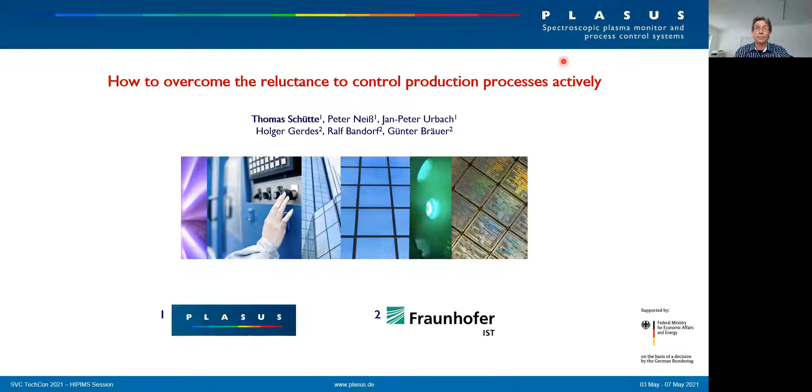Since HIPIMS is still a cutting-edge technology in production lines, I will demonstrate the benefits and perspective of active process control at a HIPIMS application. So far, quality control is mainly done at the final product. Whether it's a batch-to-batch application or an inline application, the final product is evaluated and then the process is adjusted.

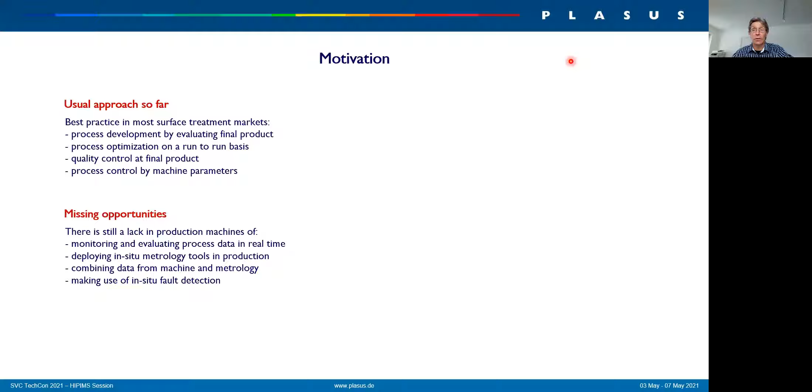However, there is no data taken from the real plasma process itself. And with this, you are missing a lot of opportunities to control and to monitor your process in situ and in real time. On the other side, there are a lot of metrology tools available today which can do this job. They can measure plasma parameters in situ and in real time. They are capable of controlling specific parameters, reliably and on a long-term basis, and they are ready for system control.

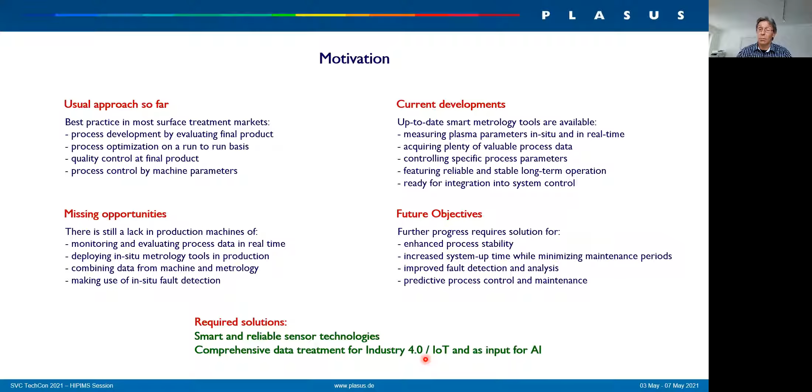And again, for all future applications, there is still the need for enhanced process stability, to make the product better, to make the process more stable, to increase production yields. And in our opinion, this can only be achieved with smart and reliable sensor technology, which will then provide data for a comprehensive data treatment within the framework of Industry 4.0 and IoT, and as input for artificial intelligence evaluation.

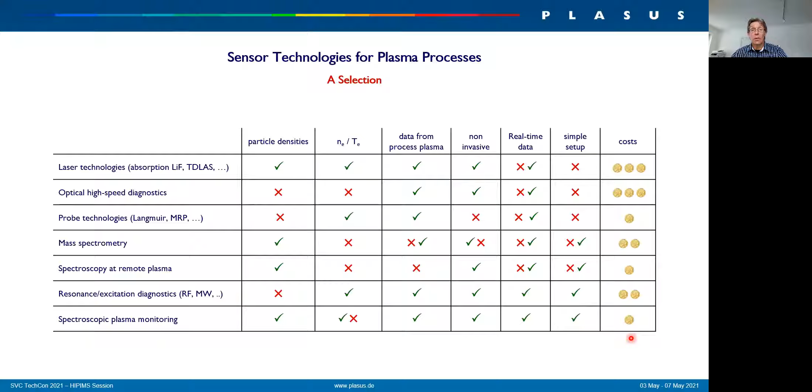Here I have listed a selection of sensor technologies which are available today. I don't want to go through this in detail. I just wanted to show that there are a lot of different types of sensor technologies available which can be adapted in production lines and which can be used. So whatever you need, pick the one you need and make use of it in your application, in your production line. But this is only one part of the game.

What the sensor technology does is give insight parameters of the process, and the idea of Industry 4.0 and IoT is actually to link even more parameters. So the final goal would be to link parameters from the system itself, from the final product, and from the plasma process, and link them all together in one database.

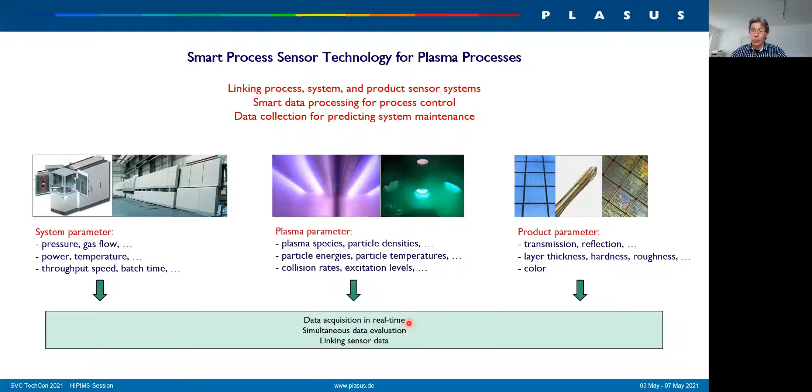And only with this can you evaluate the data as a complete set of data and then make your process more stable during the next run and give a better and faster quality control. And this I want to show you in one part for the sensor technology at a reactive HIPIMS process.

Now, in a HIPIMS process, as you all know, we have two parameters we want to change, especially in a reactive HIPIMS process. On one side, we have the ion density, which is one feature of HIPIMS processes, and you can adjust the ion density or the ionization degree by the peak current of the pulse. This is okay and known for the metallic mode, but if you go for the reactive mode, the peak current will also change if you add the reactive gas.

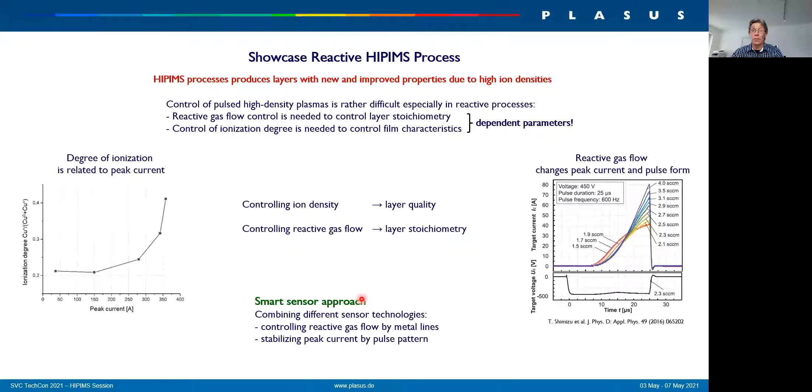So you have two parameters, the reactive gas on one side and the ion density or peak current on the other side, you want to control, but they are dependent on each other. So the idea is now to combine different sensor technologies and to measure both parameters independently. And this is actually what we did with our colleagues from the Fraunhofer IST in Braunschweig.

So what you see here, we had the sputtering application with a dual cathode arrangement. And what we did is we looked with the spectroscopic monitoring system from the top to the bottom of each cathode and took the spectrum while the process was running. At the same time, we also acquired the pulse voltage and pulse current curves in a triggered and synchronized mode with the spectrum acquisition.

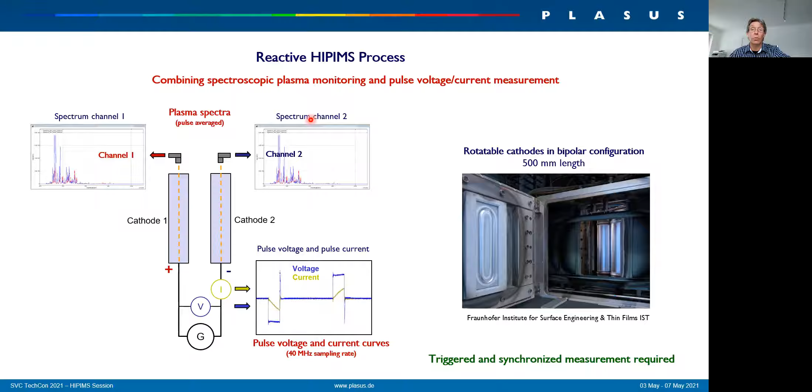And this we did for an aluminum application, and that's what you see here, what you get. The two top diagrams show you the spectra from the different channels from both cathodes. And the lower diagram shows you the pulse voltage and the pulse current curves.

Now, for process control, we are picking some monitor tracks, which means that you are looking at the intensity of specific lines. This was an aluminum application, so we had the aluminum line here. We are also looking at the intensity of the argon line and of the reactive gas flow.

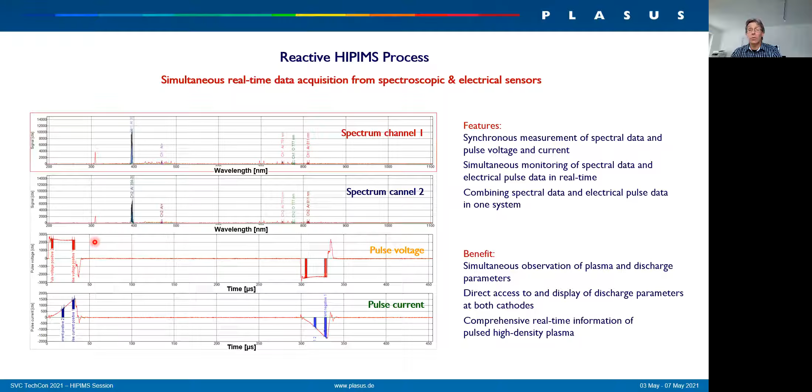And for the pulse voltage and pulse current, we looked at the peak values, and we can also do it for the shape of the peak current or the pulse voltage. So you have several options to monitor the parameters in real time in your process. And that's what we did now in the reactive process.

Of course, we started in a metallic mode, and as I mentioned already, we did it in an aluminum oxide process. Here are the parameters for the process. And we started in a metallic mode. The reactive gas flow was controlled by the aluminum line. And we monitored simultaneously the argon line, the oxygen line, the peak current, and the pulse voltage.

Starting in a pure metallic mode, we added the reactive gas flow and made a set point to 40% of the aluminum line. And what we saw is that the peak current increased. So at this point, we did not control the peak current. We just monitored the peak current. And this is actually what is predicted by Shimizu in his paper. If you're adding reactive gas, the peak current will increase.

If we go to a 20% set point, so adding even more reactive gas, oxygen, the peak current increased even more, and a lot of arcing was observed. If you go back to the metallic mode, of course, everything was stable and came back to the initial parameters and the initial settings.

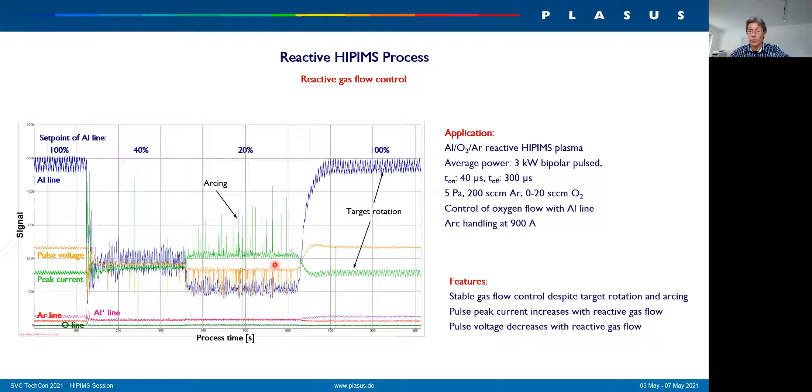And now in the second step, we stabilized the peak current to keep the ion densities stable. And this we did in this application by changing the pulse off time of the HIPIMS pulse. So again, we started at 100% aluminum metallic mode, then went to 40% and 20% reactive gas flow for the aluminum line, and now kept the peak current stable. What we see is reduced arcing, and yes, of course, with stable peak current, the pulse voltage changed. So we did apply different power at the different stages.

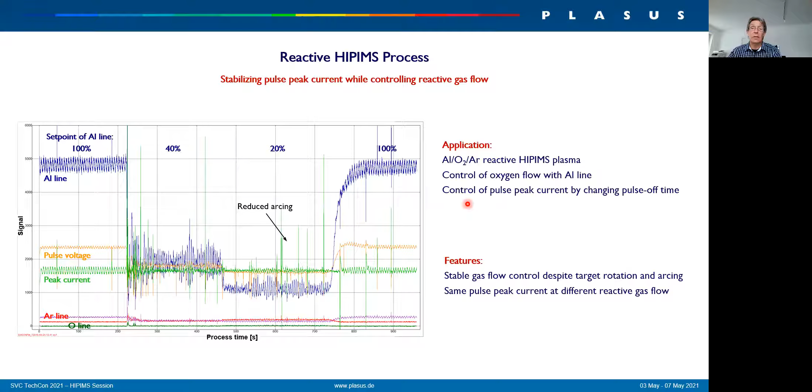Okay, what you see here is the peak current. Now, how does this relate to the ion densities? And this we did in another application, or we evaluated the data. And what you see here in these two diagrams is, again, in the upper part, the aluminum line at the different set points. Here we took the ratio of aluminum to argon, which does not make a difference to the controlling parameter. And we went from 100% to 60, 40 and 20% and kept this stable.

At the same time, we monitored also the aluminum plus lines, or the ion lines, and made the ratio to the aluminum line. And what we saw here, if we do not control the peak current, the ion density, or the ionization degree, increased. Now, while we are at the 20% reactive gas flow set point, we change the peak current by changing the pulse off times, and we could achieve that, independently of these 20% set points, so it was always stable, we could play around with the ion densities or the ionization degree.

And this is now kind of a playground where you can set your parameters independently of each other, in this application ionization degree and reactive gas flow, and find out what would be the best working point for your product, and then keep it stable with an active process control.

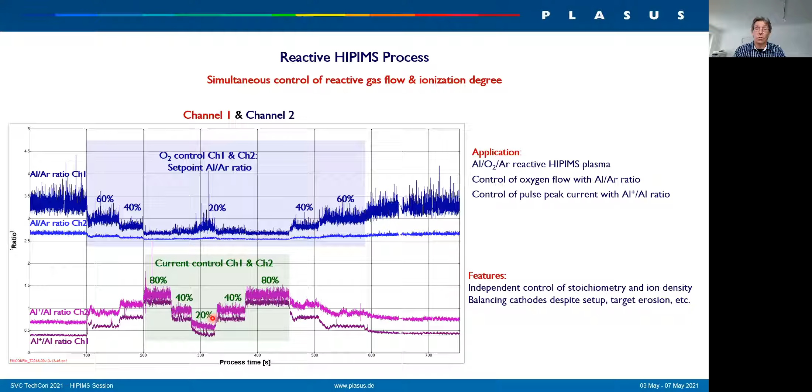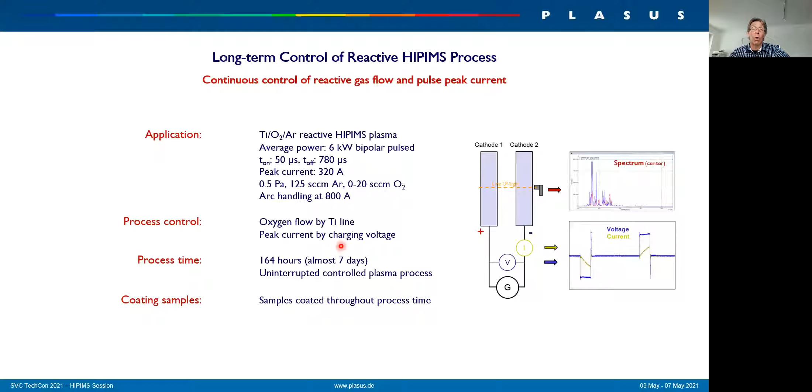And to show that this really will work also on a long-term basis, we applied this to the same machine, but to a different application. We changed to titanium targets, and now we produce a titanium oxide layer. We increased power to 6 kilowatts here to come at least close to an industrial application. And we monitored across both cathodes for this long-term operation. In addition to the spectral data acquisition, we had the pulse voltage and pulse current curves here. The oxygen flow, reactive gas flow, was controlled by the titanium line, parallel to the aluminum line, and the peak current was stabilized by the charging voltage in this case.

And that's what we get from doing this within 7 days. So this was a 7-day run. And you see here the titanium plus line, the titanium line, the oxygen line, and in addition, the pulse voltage and the peak current. In the first 1.5 days, we needed to do some adjustment. We had some problems with the oxygen flow, and we needed to adjust the PID parameter. But after 1.5 days, everything was stable, and the whole process was running for the next 5.5 days without any problems, without readjustment or anything else. You see here some deviation, but these are due to putting the carrier inside the chamber to get some layers. So that was kind of man-made.

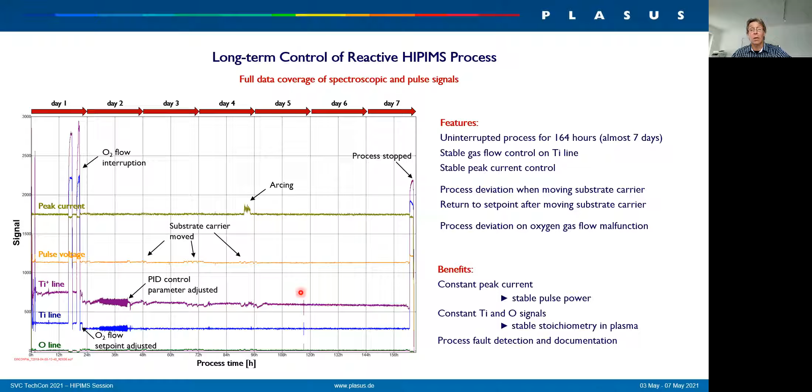This demonstrates that active process control, in our opinion, is definitely possible and reliable in production lines, and can make the process more stable, more reliable, and increase the production yield.

What I've shown you is only one part, one sensor, which puts data into your evaluation. But the overall idea, and here I'm back to the Industry 4.0 and IoT idea, is to acquire data from different sensors, not only from smart sensors, but also from simple sensors, system sensors, and put them all together in one database to evaluate them.

What I want to stress here, and this is very important, is that you need to have some kind of standardized sensor interface to put all these data together, to have the same format, the same timestamp, and so on, because only with this can you apply modeling or algorithms and learn from these data and put them together in a database for maybe later predictive maintenance. So smart sensors are important, but only one part in a big picture.

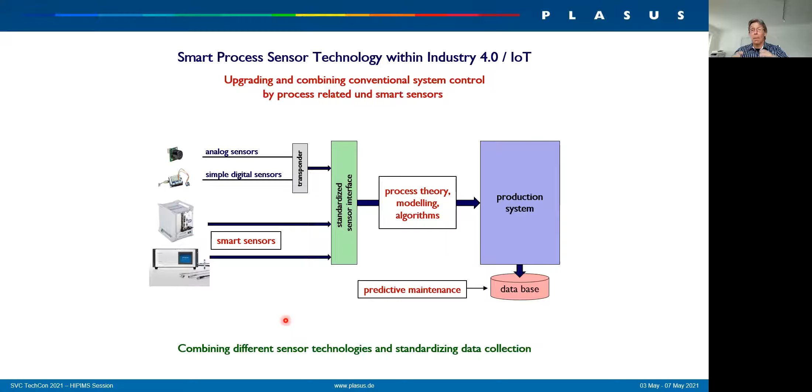And with this, I wanted to conclude. I hope I could show you that smart and reliable process sensors will upgrade your production. They are available today. They can acquire data in real time, in situ, and on a long-term basis. This will stabilize your production. This will lead to better products. And last but not least, it will increase your production yield. So we want to take advantage of the benefits of this sensor technology. That is actually one of the messages I want to give you in this talk.